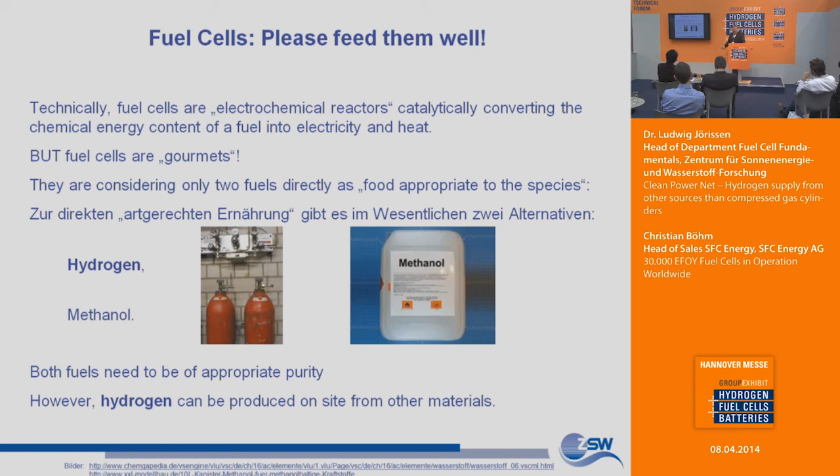Now, question is, if you don't want to bring bulky, heavy hydrogen on site, then you have to somehow produce hydrogen on site, and you can do that either by the reforming of alcohols or hydrocarbons. May it be methanol, ethanol, liquid gas, or higher hydrocarbons like diesel. You can produce hydrogen on site by water electrolysis if you have surplus energy available, or you can use a solid fuel like sodium borohydride and hydrolyze it, like zinc, as it has been done for ages in chemical laboratories to use acid to decompose zinc, or aluminum or iron.

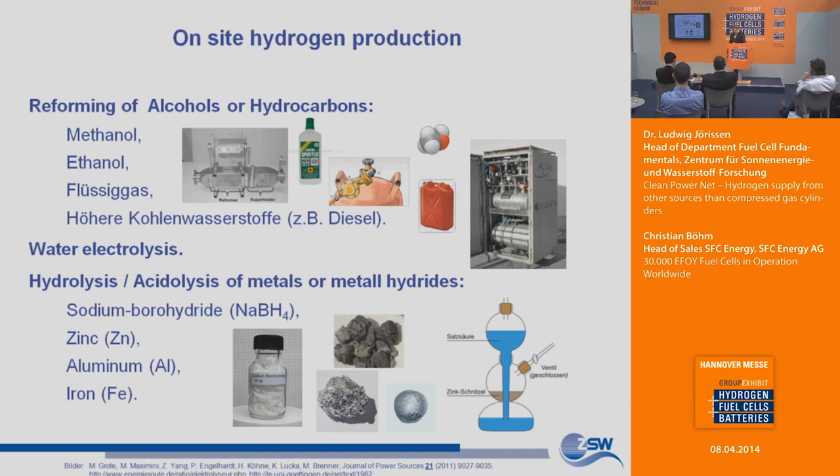Now, so far quite a few fuel cell systems have been realized, and fuels have been specified for that, and solid fuels have not yet been specified. So we have the following specified fuels. It's hydrogen; there are some SAE regulations or some new ISO standards. There is methanol, there is a methanol water premix, there is also propane gas or liquid petroleum gas, and there is ethanol. All of them can be purchased on a standardized level.

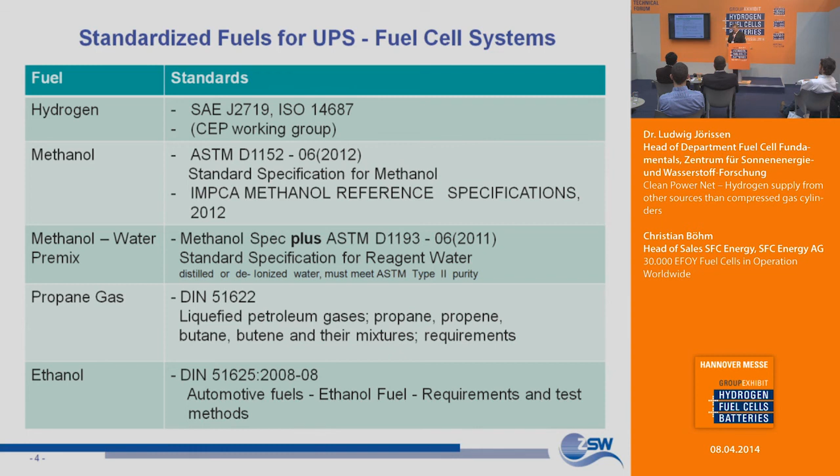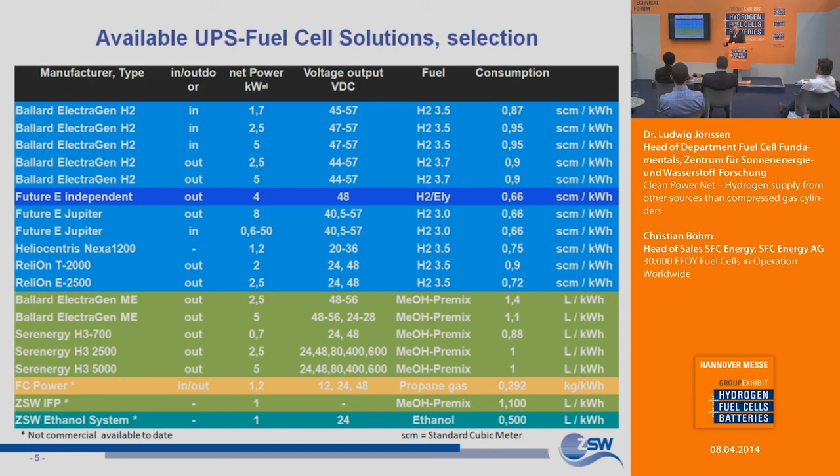And so we thought about how to use them. And we looked into some of the fuel cell systems available on the market, and found out that they have different consumptions and different requirements to the fuel. There are fuel cell systems available based on hydrogen, on methanol, and on liquid petroleum gas. And we have some own developments in terms of fuel cell systems that can be operated on methanol or on ethanol.

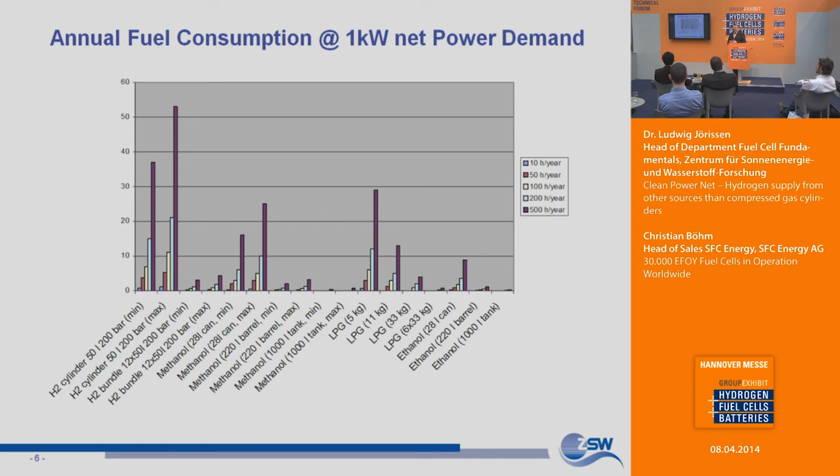Now, if you look into the actual annual fuel consumption of a 1 kilowatt net power fuel cell system, and you look into the hydrogen supply, you see that depending on the amount of runtime you have to cover annually, you come into the supply of quite a few hydrogen cylinders, which might pose some logistic problems. While when you're moving towards liquid fuels like methanol or ethanol, or gaseous fuels like liquid petroleum gas, you can significantly save on logistics cost and logistics effort.

And so if you look at the processing of carbon-based fuels, you have to look into, first of all, the fuel. You have, in some cases, the desulfurization, particularly on the liquid petroleum gas. You have to look at the reforming, then at the gas cleaning, and finally at the fuel cell, if you're not able to run the fuel directly, like methanol. So you have to take into account that fuel processing takes place at different temperatures, for example, and with different effort. If you're using liquid petroleum gas, you have to make sure that you can desulfurize the fuel, since liquid petroleum gas is odorized, and this makes some extra effort in the fuel processing unit.

If you look into methanol, you can either use it directly, and I think the next speaker will talk about the benefits of using methanol directly. But once the power gets larger, one considers maybe processing of methanol as an appropriate option to use a liquid fuel in a fuel cell system. And the benefit of processing methanol is that you can operate it at rather low temperature. So below about 300 degrees, methanol already can be decomposed into a hydrogen-containing gas.

If you're looking into higher hydrocarbons, if you're looking into higher alcohols, then you have to take into account that fuel processing goes up to 700 degrees centigrade, with all the subsequent challenges to turn carbon monoxide, which naturally is generated under these conditions, into hydrogen again.

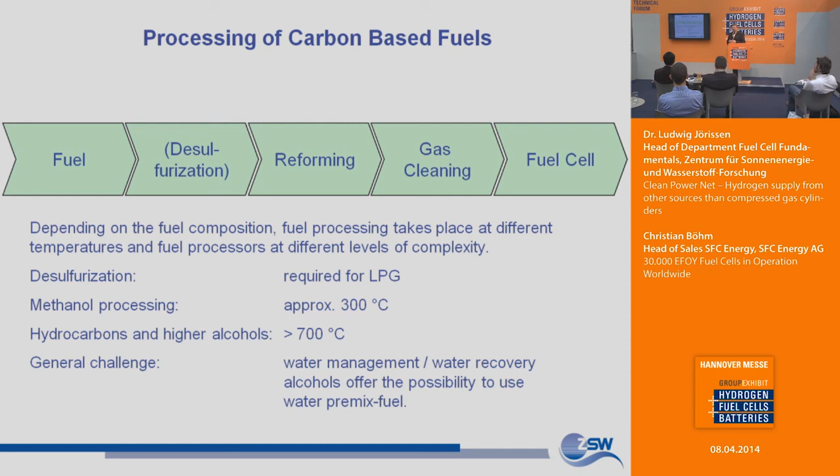So besides this, a general challenge in reforming fuels is maintaining the water balance, or providing water for reforming. Now, there is a benefit in using alcohols as a fuel, since you can make up for water losses by providing diluted alcohols as the fuel for the fuel cell system.

Now, we started to investigate a methanol reforming system at ZSW. It's an autothermal system. It's basically functionally integrated reforming, preheating, and then a subsequent reactor for CO cleaning. You see here the system as it is shown on this image. It has a reformer stack, it has an evaporator unit integrated into the reformer stack, and it has a CO cleaning unit.

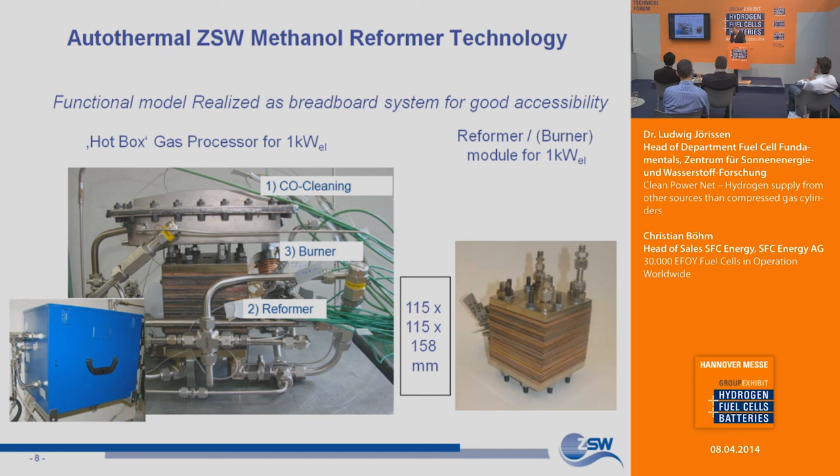And basically this is the key unit, the reformer, including the evaporator. It is composed of a plate-like reactor, and from an assembly point of view it looks like a fuel cell, so it suits us rather well. And you can basically operate it. We did a prototype, and we could operate it in a way that we can produce CO levels which are compatible with low temperature PEM fuel cells.

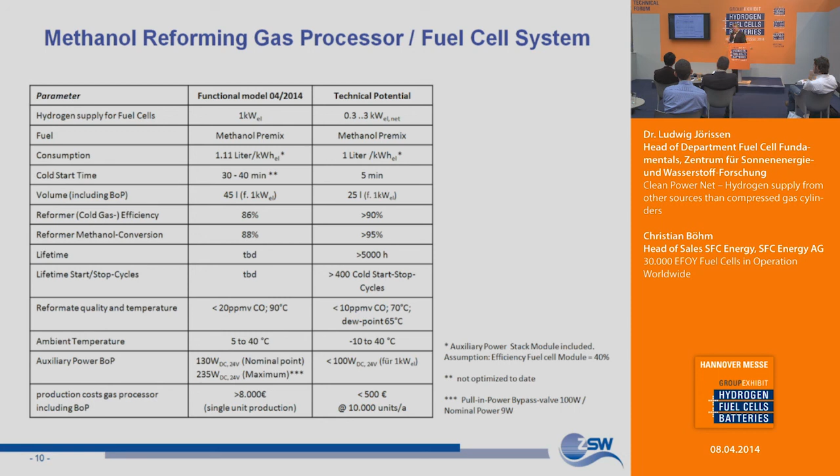We could see that it starts and stops. We could see that it basically works, and we could verify that in a further technical development option it might well meet the requirements that are set out for a fuel cell system that's out in the field.

This gives some packaging studies. So in total, at its current stage, it packs into a 45-liter packing volume, and with some optimization on the piping and on the reactor design, we are confident to pack it into something like a 25 to 30 liter volume.

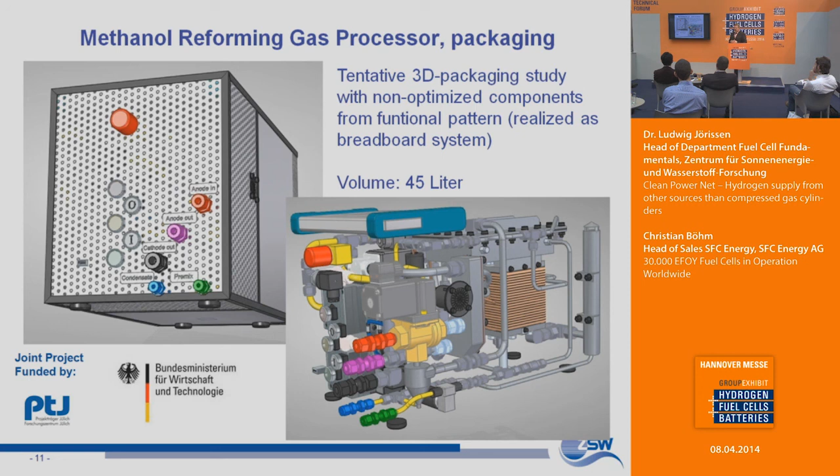Now, still, with the fuel cell system, there is a CO challenge, and we have to meet it somehow, for example by using CO-tolerant fuel cells, which we are currently doing, a CO-tolerant fuel cell that can tolerate up to something like 10 ppm CO. But another challenge remains: what to do with the unspent fuel in the CO-tolerant fuel cell.

And in this case, we can tune the turnovers in a way that the unspent fuel can be used to evaporate water and methanol for the reforming reaction. It's an autothermal reformer. The autothermal reformer allows a fast startup. However, it has limitations to make use of the spent fuel.

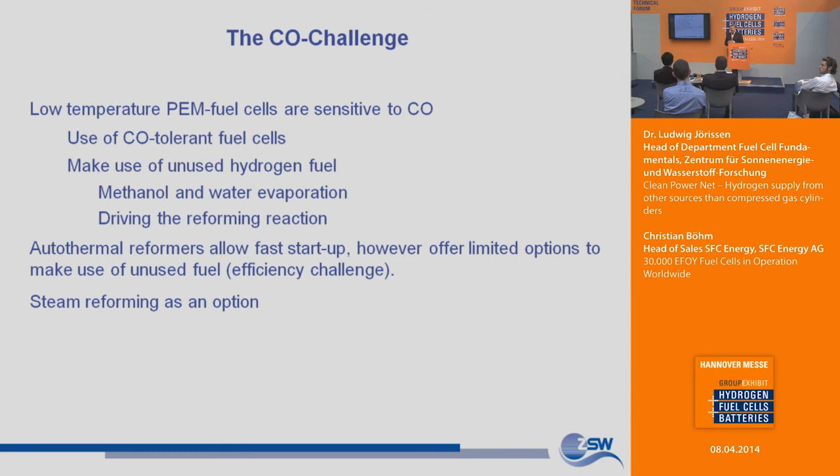So if we want to make better use of the spent fuel and operate the fuel cell stack in a more optimized way, we could go to steam reforming as an option. And one option in this case is the steam reforming of ethanol. We realized that in a 1 kilowatt system, which we had on show last year at this fair.

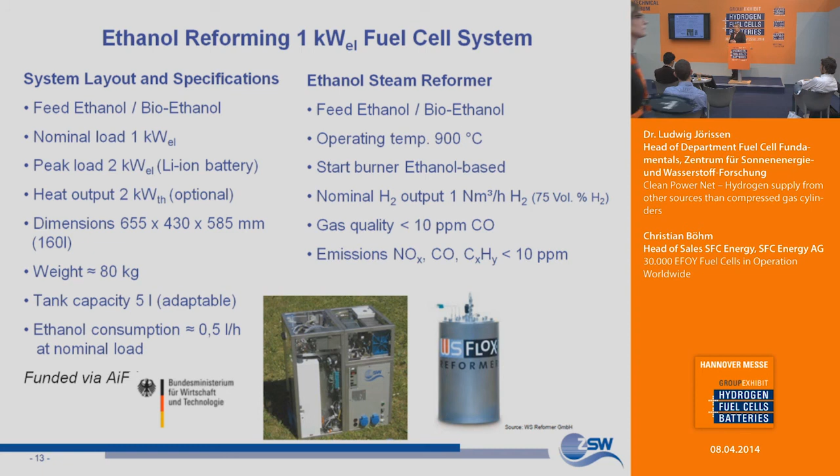And we also were able to integrate a reforming system that has a gas quality below 10 ppm of CO, and that basically drove the whole system with an integrated ethanol supply of some 5 liters, which allowed operation for several hours, or up to a day.

So as a conclusion, especially if we are looking into high power demand, long grid outages and long operating times, the supply of gaseous hydrogen is posing a logistic and a cost challenge, obviously. Fuel cell systems with an integrated gas processing technology are addressing this issue. Methanol is one good option to provide a lightweight and easily processable fuel. It can be reformed at low temperatures.

It survives with a single stage CO cleaning unit, and if operated autothermally, it offers fast startup possibilities, however with limited options to make use of unspent hydrogen. Methanol as a chemical is inexpensive, but methanol is a chemical and has to be handled in a way that the user does not get into contact. And even methanol water mixtures are available commercially on the market.

Propane and ethanol are excellent alternatives. They're also available on a widespread wholesale basis and individual sale basis. And so in general, if the challenge of the fuel cell system is long duration, then liquid fuels and fuels other than hydrogen pose a good option to cover that.

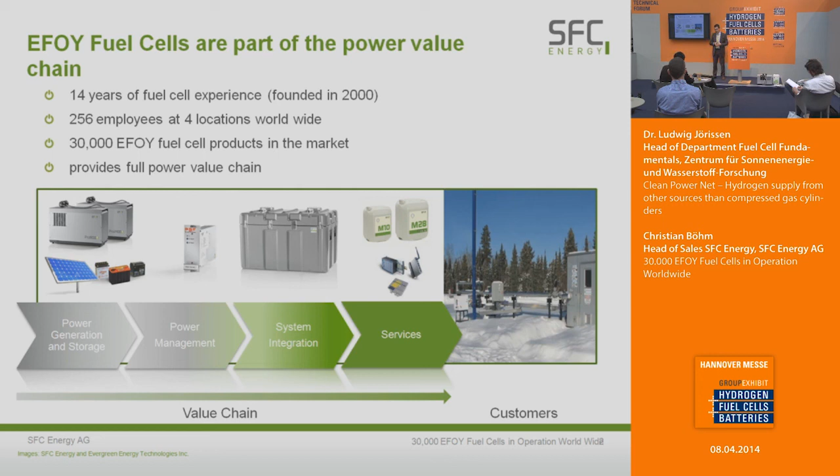To get there, number one is a robust technology. SFC believes in its power range in DMFC technology. We heard in the previous presentations about the technology. SFC does have a strong IP portfolio as a base. 33 patents have been granted, and you see a few of those inside the system regarding the stack, water management, also the fuel cartridge, and I'll talk about that later on.

Also very important and very significant are the certificates that we have gone through to meet industry standards and to enable the fuel cell to be accepted on the market and to be applicable for the applications worldwide.

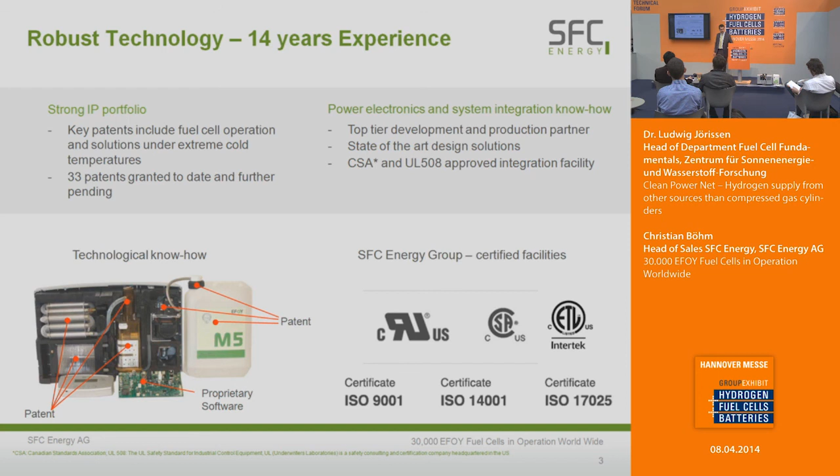This slide I like a lot because it shows in one slide what it means to have a very easy to handle and safe to transport fuel. On this slide you see the little girl on the left side here carrying one of our standard cartridges, 10 liters of fuel that has an energy content of 11 kilowatt hours. And just as an example, on the right side you see the same amount of energy stored in conventional lead acid batteries of 270 kilos.

So that one slide explains to you what the key benefit of the fuel cell using methanol as a high energy density fuel is. And the success story of the EFOY fuel cell is based on this fact.

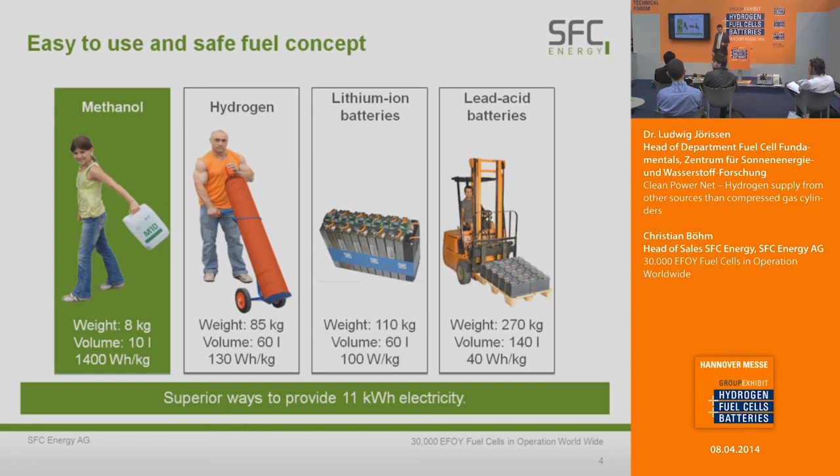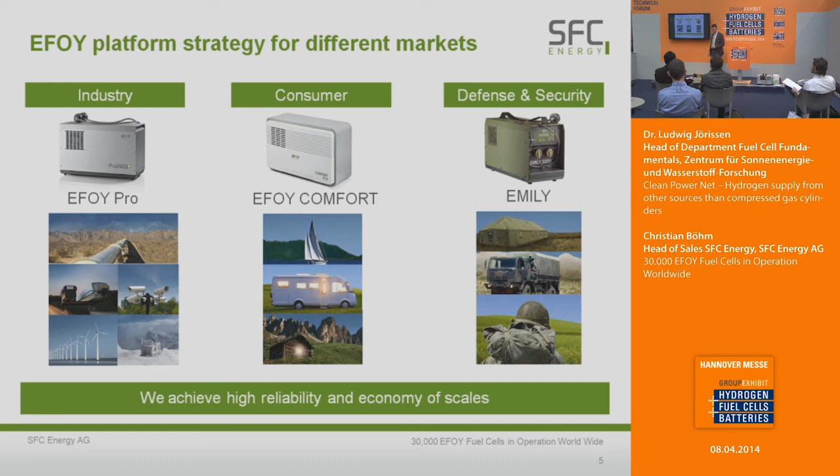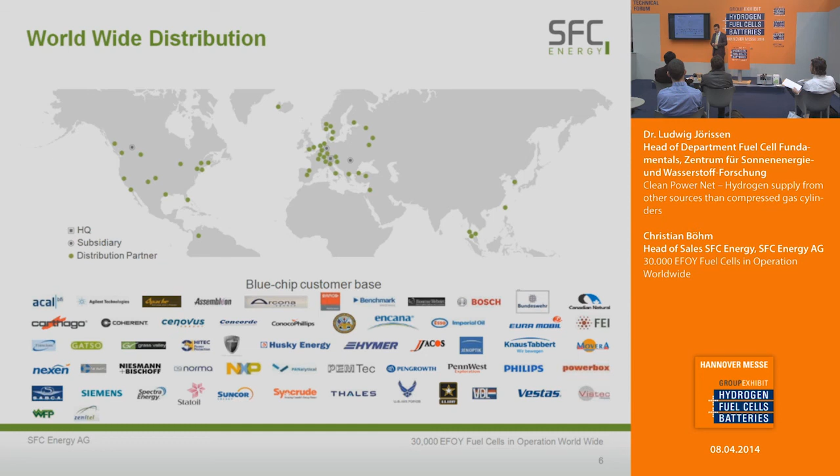Overall, 30,000 fuel cells have been deployed so far. I brought to you today in one slide several of the applications that I'll go over real quick. As I mentioned in the beginning, the leisure or consumer market was our first mass market where we could actually achieve significant production rate numbers, and also sailing boats. We also see applications along railways, automotive on the highways, parking systems, very often also security applications where the fuel cell with our power level matches very well to the power demand of electronic cameras.

And a growing market for us is also oil and gas, where by definition you face an off-grid situation, and there a fuel cell supporting instrumentation, cameras, and security applications is of course a very nice application.